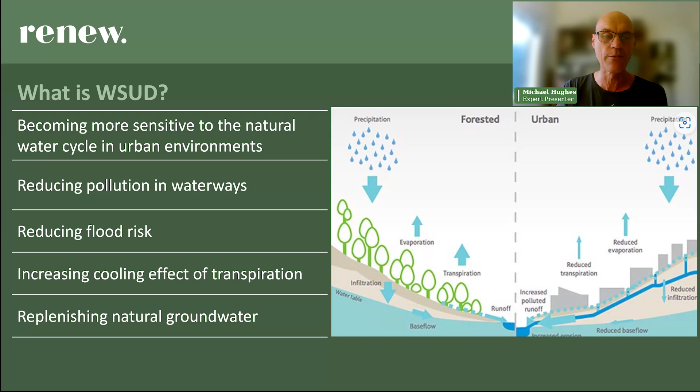And the easiest way to do that is literally getting out with an umbrella in pouring rain and having a look at what happens and taking photos and hopefully map where it's actually flowing. Where are the boggy spots? Where are the dry spots?

So the main overall principle is to slow water down, soak it up and let it sink in, which is essentially what the forest does.

You're wanting to make the water work harder before it leaves your property. Gravity is your friend in this. Obviously, the pattern for water is that it flows from uphill to downhill. And so you want to take advantage of that where you can and not use pumps to move it around. It's very property specific.

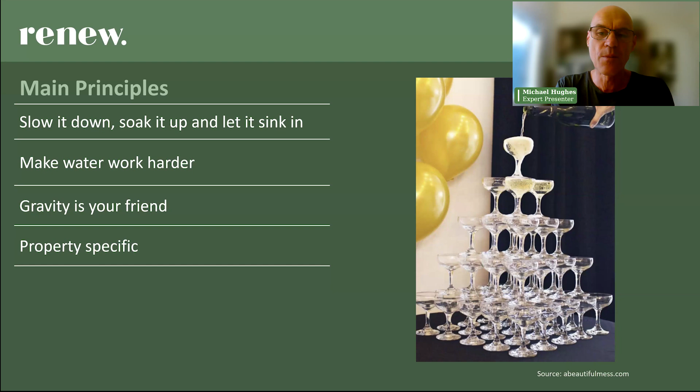So with these unique challenges, being property specific, like every piece of land is different and your house is placed differently on that block of land to everyone else, even your next door neighbor. It's great to go and look at open house events such as Sustainable House Day. You can go to edible garden trails or other open garden events, chatting to the neighbors, friends and family. And what I've found is they generally don't have exactly the same issue that you have, but I learn bits of the puzzle with everyone I speak to, and gradually I can put together a plan that works for me.

And that word there, the plan, it's quite important to have a plan, particularly for stormwater and what you're going to do with it. There are obviously mains water, stormwater, grey water, and irrigation that you can sort of have some influence over. And it's stormwater that generally causes all the issues. Pipes are a real pain to move once you've constructed everything else. And plumbers aren't cheap. So if you're going to get them to dig holes, they're very expensive.

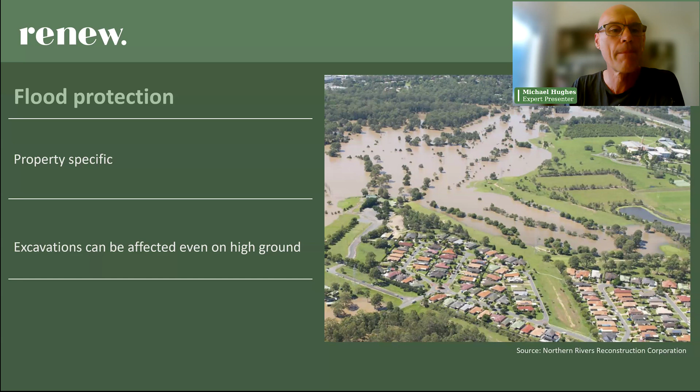One of the first things you can do with water in the home is basically do a water audit. This is a very warts and all look at how you use water. It's quite sobering most of the time. It also helps you work out ideally how much you need to harvest. If you think about grey water in the garden, there's a lot of habits that may be easier to change and be the largest water saving you can make.

How much water you use on a weekly basis times by the amount of drought you have. So if I think around here it was about 6 weeks is the longest we ever really go without any rain at all. So I just worked out how much I use per week, times it by 6 weeks. That's how much water I need to save in my tanks so that I can go through a drought.

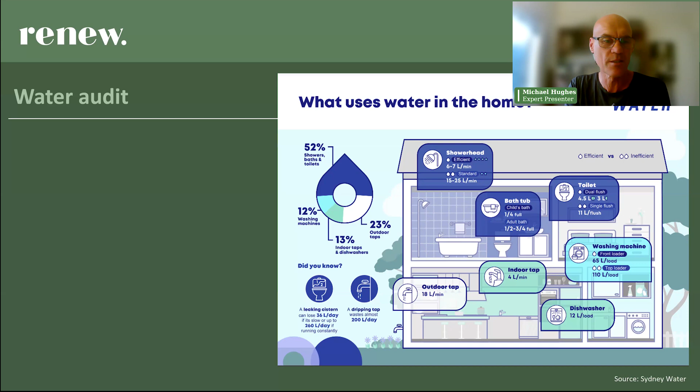There's a couple of resources you can use to help work out how much you use, and see where savings can be made. There's the Australian Water Efficiency Labelling and Standards Scheme, which requires products such as shower heads, toilets, washing machines, dishwashers, taps and flow controllers to be rated and labelled for water efficiency. This rating helps you make an informed choice for your budget. Water consumption also influences energy consumption for appliances that use hot water, such as dishwashers. So whilst lower water use is better, you need to watch out that it doesn't compromise the appliance's effectiveness.

If you look at that URL there, www.waterrating.gov.au, that's the home for this scheme, and you can have a look at different appliances on there.

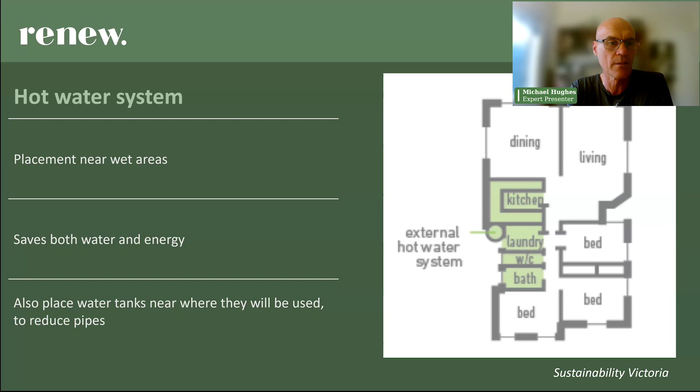With a hot water system, there's some easy, quick wins you can make to save water, especially if you're building from scratch. Put the hot water taps as close as possible to the hot water source so you're minimizing the waste whilst waiting for the hot to come through. I'm sure everyone goes into the shower and waits for the cold water to go down the drain before the hot comes through. If you can get that hot water tank right next to the shower taps, there's less pipe for that cold water to come through, and you've saved a load of water really easily, and energy to heat that water up again.

We're not talking here about black water, which is from the toilet and nappy washing. The kitchen sink is the grey area in between black and grey water, because you're potentially putting meat residue and oils and fats down the kitchen sink, and that creates an absolute nightmare because you have to process all that before you can use it in the garden. Grey water is literally the hand basin, shower, laundry, where you're not putting real nasties.

It needs careful planning and essentially to be free flow into the garden, because if you let it sit for more than 24 hours, you can accumulate pathogens in it. This can be a significant change to your habits. When you start looking at how you can use this water, you need to analyze what kind of cleaning products you use. So the problem goes upstream, looking at what you're actually going to put down that sink in the first place. You don't want any hazardous or harmful chemicals if you can help it, so have a look at the stuff you're already using and find out how eco-friendly it is.

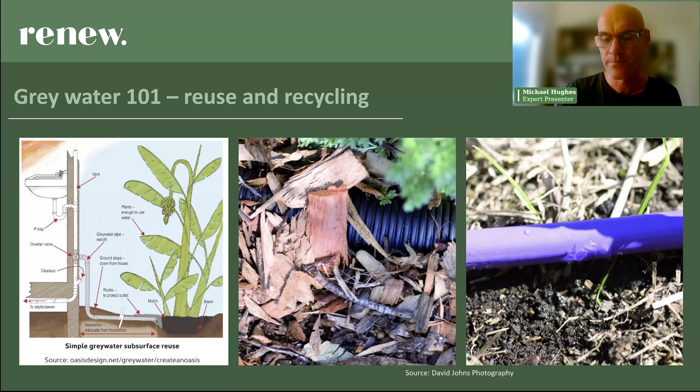When we're talking about gutters and rainwater harvesting, what we're really talking about is water tanks and the whole water tank system. The first choice you have to make when choosing a water tank is deciding whether that's going to supply the house, the garden, or both. That obviously affects how much storage you'll need for the tanks when you're doing a water audit. Any water that's destined for a tank needs to be as clean as you can possibly make it. Maintaining that system is a lot easier than cleaning out the inside of a tank - you can actually die from going inside a water tank because of gases that can build up in there without you knowing. So yes, it's essential that you keep the water going into it really clean.

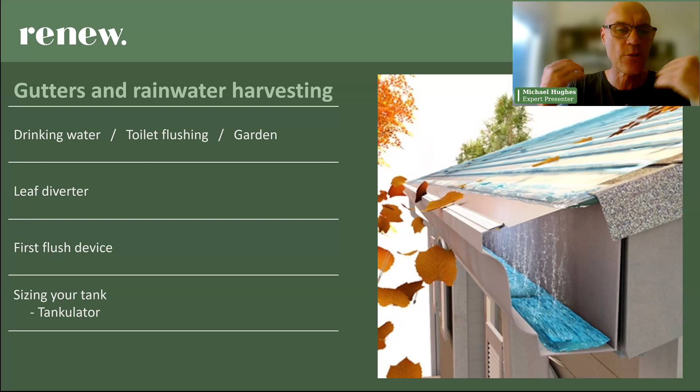First up, we try and keep the detritus out of the gutters and use gutter guard. Below the gutter, you can use a leaf diverter, so the water passes through the leaf diverter and the leaves just blow off the surface of it. When it's gone through the leaf diverter or out the gutter, it's coming down this pipe on the horizontal here, and it goes into a first flush device. These are fantastic at getting the bulk detritus out of the water.

If it hasn't rained for a couple of weeks, there's loads of build-up on the roof, a few leaves knocking about. Then it rains, a good rain, 20 mil, so loads of water's coming down through this pipe, washing all of that detritus that's built up in the initial flush of rain. That comes down this pipe and flows straight to the bottom, and the initial, ideally 20 litres of water, collects in this bottom section containing all the rubbish.

By the time it's filled up to this level, clean water is now coming down this pipe, and that gets diverted off the horizontal into the water tank. You can put a little tap on the bottom of your first flush device, or this one's probably got a dripper on it. Some of them drip continuously, and the rain falling is harder than the drip, so it fills up. But when the rain stops, it just all drips out, empty, back into the stormwater pipe down below.

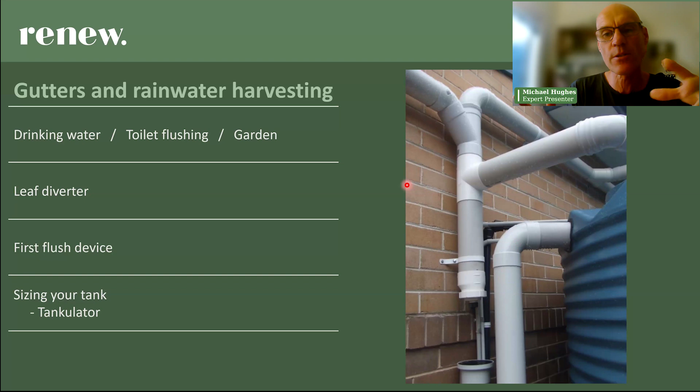Another essential feature of a water tank is the volume of water going in. Once the tank is full, the same volume of water is going to come out, which can be really significant, and people really underestimate the volume of water coming out of the tank once it's full. They think, oh yeah, I'll just put an open pipe and let it go on the lawn. But when it's rushing out of the end of a pipe in a concentrated way like that, it can easily erode whatever's downstream. So a good place to put water tanks is on one of those dark, unused sides of their house. If you've got a choice, that's a great place to put them.

The water that goes off the tee into the water tank - tanks are usually supplied with a basket that collects any leaves that have got into that system later on. You need to be able to reach that sieve and empty it out once in a while. That means, generally speaking, you need space to put a ladder quite close to it so you can easily reach it and unblock everything.

Ideally you'd clean everything out after every rain event, but I can tell you from experience that doesn't generally happen. I set myself an alarm on my phone to go and clean everything out once every 6 months. That basket also stops general debris getting into the tank, and also wildlife. You don't want dead things floating around in the top of your tank, poisoning your water.

There are all sorts of shapes and sizes of tanks. Once you know what volume you want, you don't have to buy one tank. It's actually beneficial to have multiple tanks so you've got redundancy - if one tank leaks, you've still got some water available. I've got 4; most of them, well, 3 of them are fairly small, just dotted around the house where I can fit them in. And then I've got that big one I mentioned before, the 10,000 litre one.

They come very narrow, like 750 mil wide, so you can fit them on a path down the side of the house. It's not good to place them against the boundary of your property - there needs to be a path around the edge, between the edge of the property and the water tank. So the perfect place is under the eaves if you're going to put them right next to the house. You can also put tanks under the house.

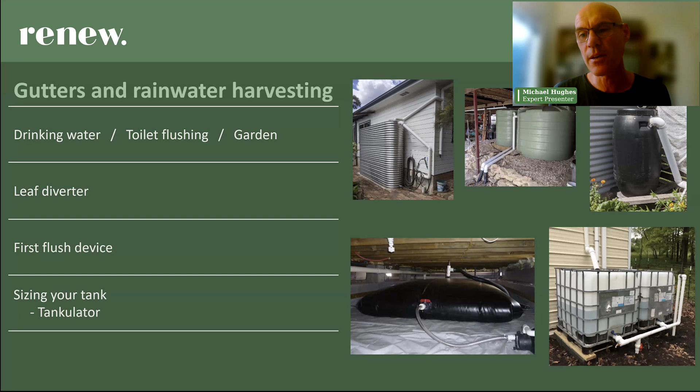Your tank doesn't have to stick out. You can use trellis and plants to disguise a prominent tank. You just want to make sure you can put a ladder up so you can access it for maintenance purposes. Particularly with the rectangular shaped ones, you don't want to be leaning a ladder up against them. Round ones aren't too bad, but the rectangle ones are kind of unstable when nearly empty. So you need to be able to stand on something high enough to get hold of the basket and maintain the inflow pipes to the tank.

So we'll move to the garden. If you want to save water in the garden, native plants are absolutely the number one option. Really low maintenance for time-poor gardeners as well. Councils produce lists of suitable plants - I know my own council has one, so check out lists of plants for your local area. I go bushwalking and find out what plants look great in my local bushy areas, then go to nurseries and try to buy them and replicate that in my own place.

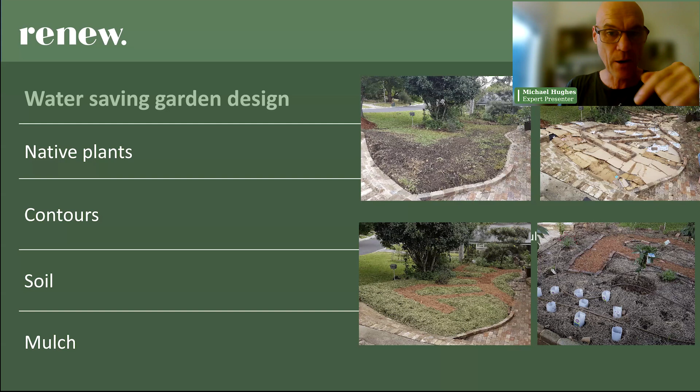Another not often used tip is to make effective use of what you already have in the landscape. So if there's a wet, boggy area, is that a good place for a pond? These two photos - the top one shows where my pond is, back in the day. It was just a huge rock outcrop and water collected there when it rained.

We'd get frogs and tadpoles. They'd have to grow up really quickly before the sun evaporated everything and it went dry. So I just bricked around it and filled it in a bit more so that I made it hold water, so that the water's more of a permanent feature.

You can link ponds up in chains through your garden with spoon drains. If you have a particular sort of water course going through your land, you can slow the water down with successive ponds going through that. The pond itself is probably the single biggest factor in improving biodiversity in the garden - insects love the pond.

As I said before with the water audit, changing your habits to use maybe an outdoor sink can help water the garden rather than going straight to the stormwater waste. It makes you think about the kinds of jobs you do - like washing the spuds outside. Can things be done inside? Washing the potatoes in the kitchen - can that be done outside in your outdoor sink and water the plants at the same time? You can create structures around your house, such as eaves, awnings, fences, external blinds and trellises.

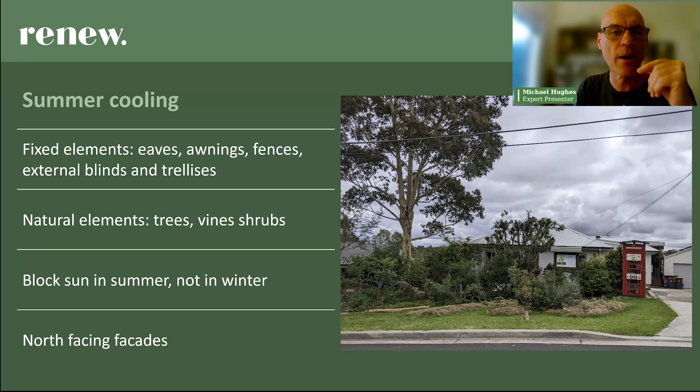This photo shows the layers of the forest providing dappled shade, which creates a more comfortable living environment for the house and also stops other plants from being scorched by the summer sun. That massive eucalypt is on the western side of the house, and it shades a good portion of that and the front garden for most of the hot day.

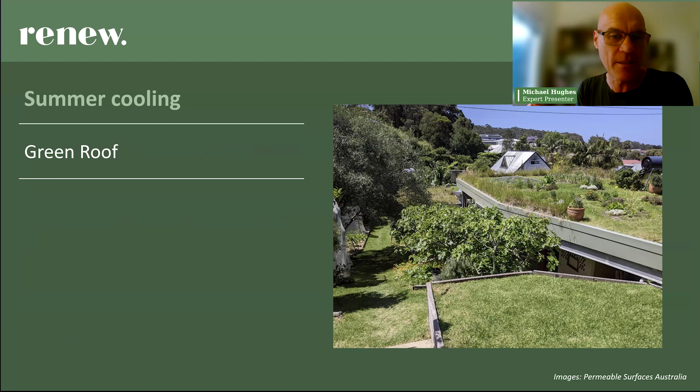Green roofs are another excellent solution, but they require engineering. They're great for insulation, cooling, and transpiration effects, where there would otherwise be heat coming from radiant tiles or reflective material. But they really need engineering solutions because the weight on your roof is a problem for existing houses that maybe aren't built to deal with it.

This gets back to what we touched on earlier - if you've got excessive rain falling and problems with it coming into the house, you can redirect heavy water flow around your garden and hopefully not through your house. Swales, French drains, and spoon drains are really simple solutions to moving water around the place.

These are swales that I dug on the back lawn. On the top photo, the blue arrows show the path that the water used to take - from left to right, and on the right is a cliff. There'd be a huge pond on the edge just before the cliff, and then it'd pour off the back. There are houses down below us, and they must have been inundated with water at certain times of the year.

I marked out contours, using the pinky looking bricks and twigs to mark out the contours on the lawn. So they're not straight across the lawn, they're slightly curved.

Then I dug holes - the swale is actually the hole you dig along the contour so that water fills up that hole and sinks in. One swale leaks into the other. So if water fills up the first swale, it overflows into the second one, and so on. You're creating this champagne tower effect, moving all the way down the lawn.

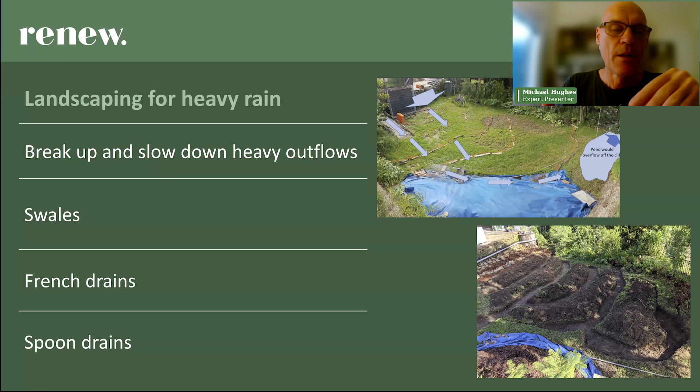The other beauty of this is my food forest - I've dug a ditch, which I then fill with wood chip that I'll show you in a minute. I dug the ditch and put the soil on the garden bed, so the garden bed is raised and there's a ditch below it. The total distance between the bottom of the ditch and the top of the mound is about 400 mils, or nearly half a meter. That creates the perfect growing conditions for fruit trees, which hate waterlogged roots.

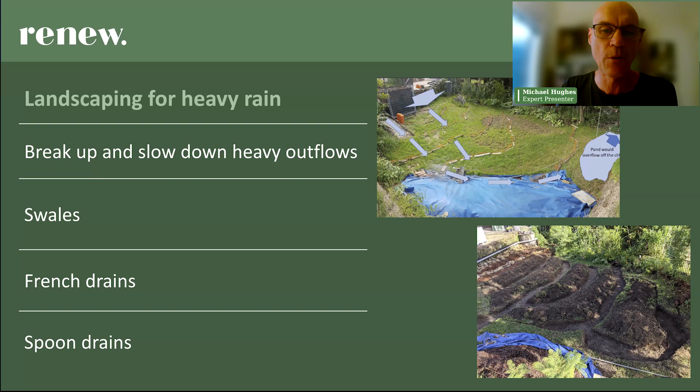So the place never fills up with water, but the wood chip soaks up the water like a sponge and keeps everything damp. There's the swales filled with wood chip, and you can see the mounds a bit more clearly.

The level spreader at the top here - water comes off my driveway. I've got a grid at the bottom of the driveway in front of the garage, and all the water that falls on that comes down a pipe without leaking anywhere and goes into this level spreader. The reason I didn't want to put it on the rest of the garden is because I've got edibles higher up the food chain.

The detritus off the driveway could contain anything like oil from the car, for example. So the first garden bed at the top, I just plant non-edibles in, and that is my biofilter. The water gets filtered out before it goes into any of these swales.

The bottom photo is what it looks like, or roughly what it looks like now - it actually looks more of a jungle than that at the moment. But yeah, loads of fruit trees and everything growing together, and a really successful way of growing fruit trees.

This last photo is the level spreader in action - you can see all the holes pouring at the same time, on dead level again. It's gone through the non-edible bed here into the wood chip, and it's rained that hard that it's actually filled the first swale up, and that's in the process of leaking into the second swale. I've never actually seen it fill the second swale up, so either it's soaked right in or it's all just underground and I never see it.

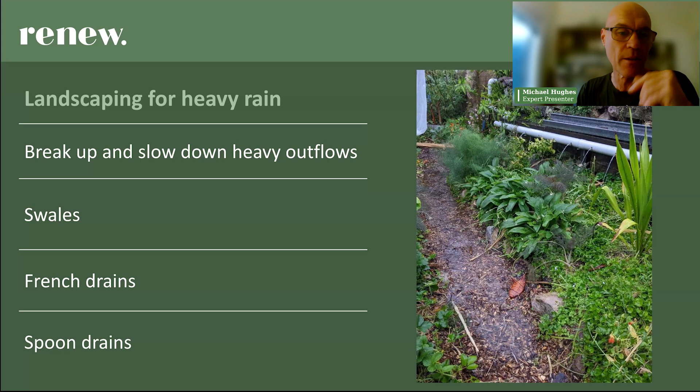You line it with landscaping cloth, put a bit of gravel in the bottom, and then put a pipe with holes in it on top of the gravel, maybe 10 mil of gravel, so it's off the floor. The pipe has holes in it and is covered by a sock so that plant roots and small bits of gravel can't get in and block it up.

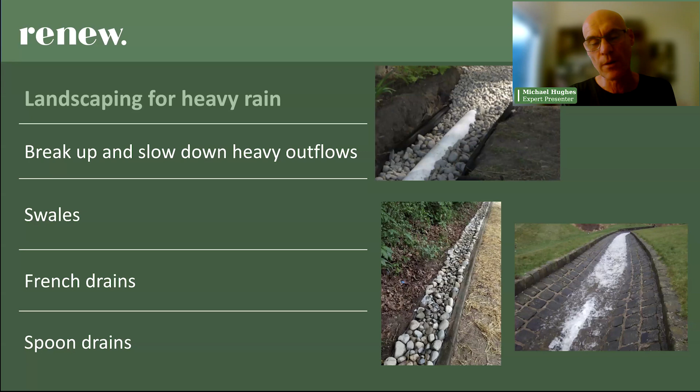Then you fill the rest of the ditch up with gravel, completely covering the pipe, as you can see at the top part of that picture. You can wrap landscaping cloth around all that, or a slightly less good solution is just to put soil over the top and whatever you want, grass or plants. Water falling on that will percolate through the gravel - small amounts just keep going into the floor, but huge amounts fill up the drain channel, and the pipe is the point of least resistance because there's nothing in it, so excess water goes out along the pipe to wherever you want it to go.

If you put these on a slight downslope, you can redirect heavy rainfalls around your house to the downslope side. And you can see the spoon drain there, which is just surface water flow, a different solution. Small volumes will soak in between either the pebbles or the bricks, but large volumes can get away and go somewhere different.

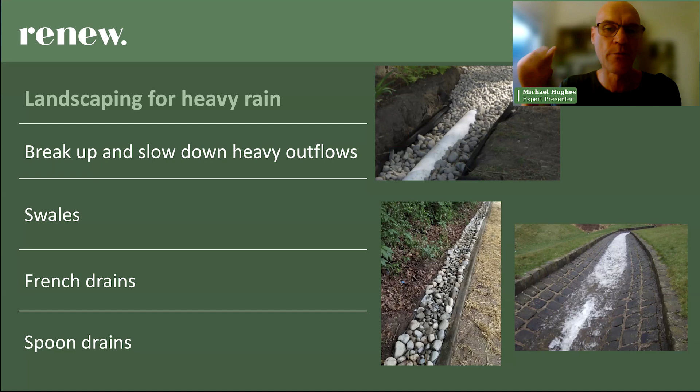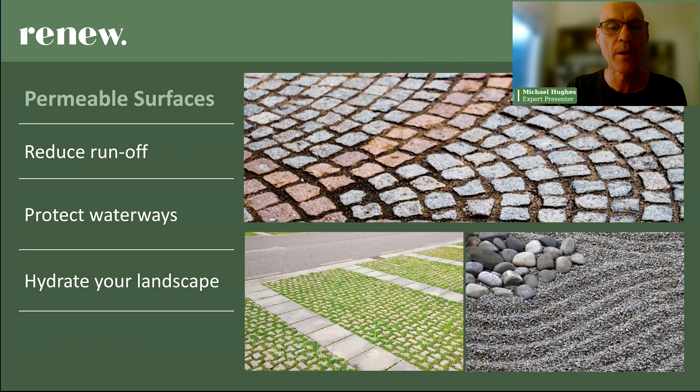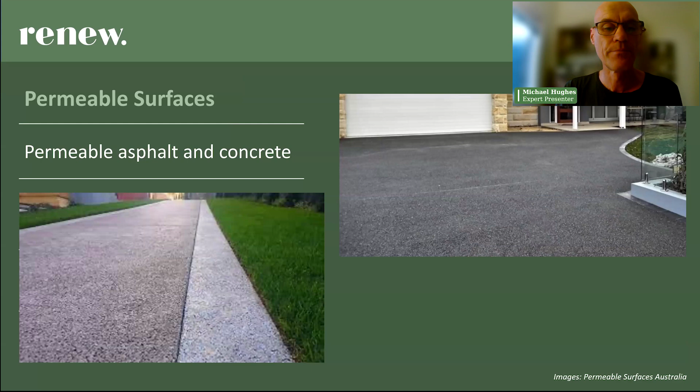Nowadays you can get all sorts of permeable surfaces - lawn, garden beds, gravel, paving, fake grass. They're all permeable. It's about being creative with products designed to let water soak into the landscape rather than run off. If you can use a porous solution rather than an impermeable one, that's a lot better. You can even get permeable asphalt and concrete, so it looks like concrete but really water's getting through it into the landscape.

Another couple of novel solutions to save water and green your property: wicking beds are fantastic for time-poor gardeners. They need to be installed on a level pad, so they're really good for areas of concrete that you want to try and green up a bit. You can get all sorts of solutions, either homemade, purchased, or off the shelf.

So when you've filled it up with soil, the plants are drinking exactly what they want rather than you trying to guess what to put on from the top. And there's hardly any water evaporation, so they save water.

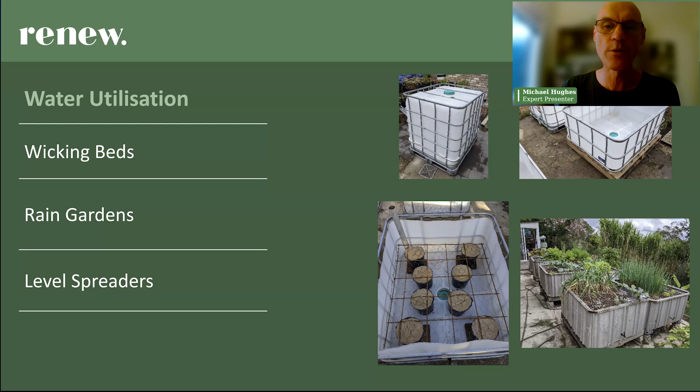They usually have an overflow hole at the top of the reservoir, which I forgot to mention and can't see on these diagrams. Level with the top of that module will be a hole in the side, and excess water just leaks out of the garden bed onto the floor. So when you're filling it up with this pipe, you know it's full because it's leaking outside.

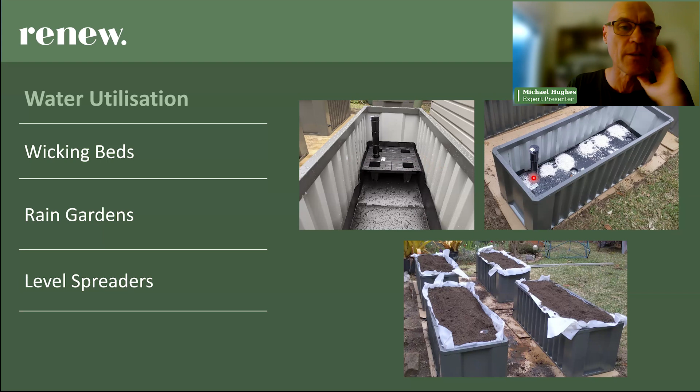So it pipes the excess off, a bit like a French drain, to where it can go and not cause any harm. But you can grow plants that love dry weather, but then don't mind a good soaking and a drowning once in a while.

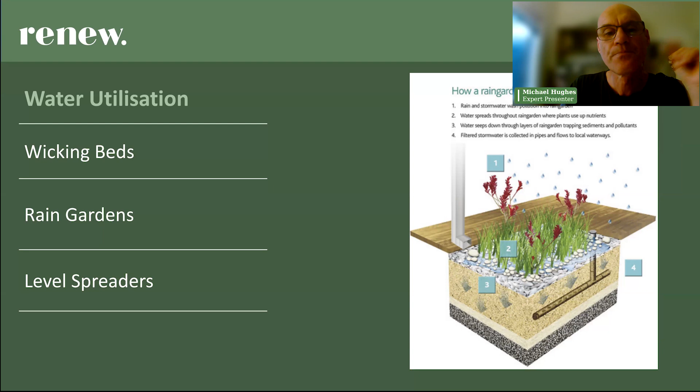There's a whole suite of plants that you can get that suit rain gardens really well. This next picture shows one in action. This is similar to the water tanks in a way, in that the water coming in is down a channel, high energy, lots of water.

You don't want the channel going into the rain garden to erode, so you line it with pebbles. That stops everything moving as it's going into the main bed. It fills up the main bed, but then once it's full, water's got to go somewhere.

And so they put an outflow channel and line that with pebbles because the same water is going to go out that came in. And then it goes to the street and off down the stormwater system. But at least most of the water gets soaked into the landscape in this great design.

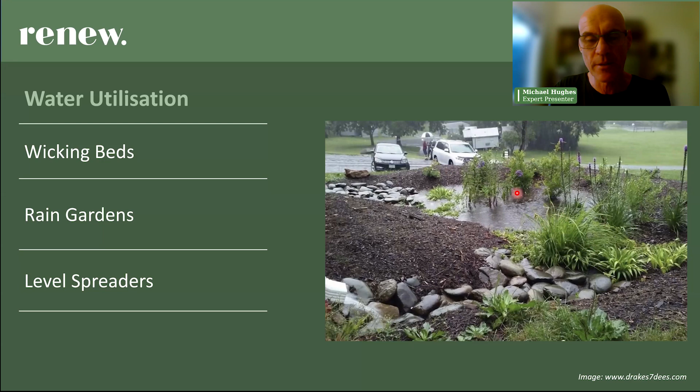And then finally, we'll talk about fire-wise gardens. This fire management is extremely property specific. The shape of the landscape really heavily influences the type of fire hazard you have. So it depends whether you're on the cliff edge or the valley floor. Fire races up cliffs and up steep slopes, and so you'll have a completely different scenario high up as you would lower down.

You can use fire retardant plants spaced apart to reduce the fact that embers pass from plant to plant. Using non-flammable materials to do the heavy landscaping part, such as brick or stone rather than wood chip. And maintaining that and keeping it clear of leaf litter, dropped branches. Again, that water tank maintenance with cleaning your gutters is handy. And keeping it all hydrated, like having lots of organic matter in the soil so that it stays moist and doesn't ignite so easily.

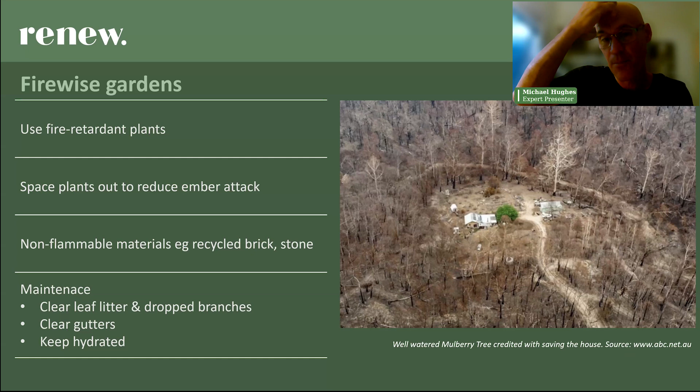This is a photo from the ABC that I saw after the massive bushfires in 2019, in Victoria somewhere. You can see that they've cleared around the house to reduce the leaf litter around the house, but everything burnt apart from the mulberry tree in the middle, which is credited with saving the house. So that mulberry tree would have been transpiring like mad because it would have got really hot and created its own little microclimate, I'm supposing, that would have saved the house and made it less vulnerable.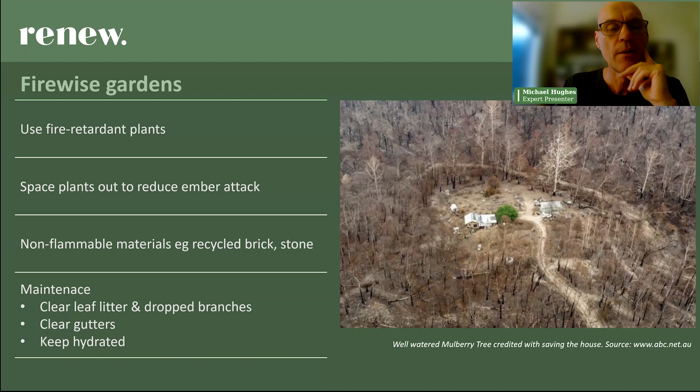Thanks so much for that, Mike. It was really, really interesting and brilliant how many examples you've used from your own place. Yeah, very cool to see. We do have a few questions and we'll get to those very soon.